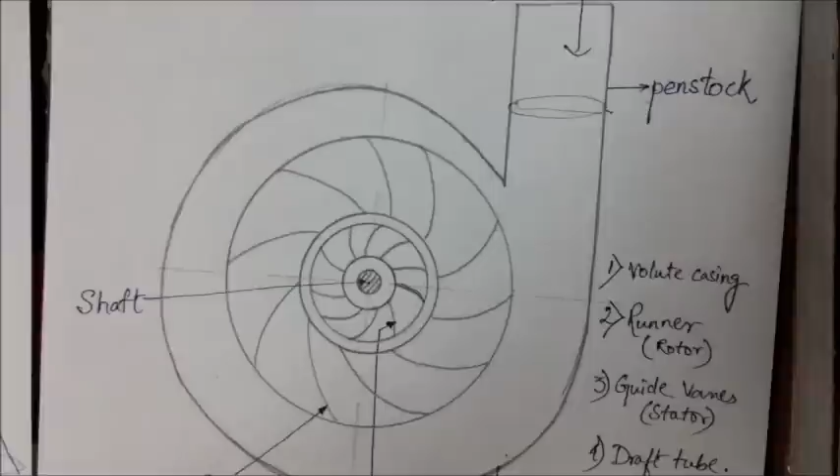Today I am going to discuss the Francis turbine. You can see this is the picture of a Francis turbine.

It is named after J.B. Francis. He was an American engineer, and he designed a turbine which can work at different pressure heads. Today I am going to discuss each and every point on the Francis turbine and also its velocity diagram.

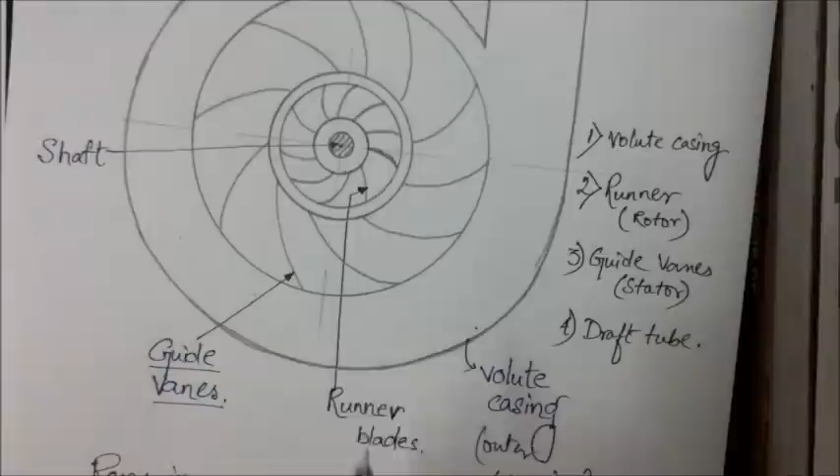First, let me tell you the names of different parts. This is the volute casing. This outer casing is actually the covering of the turbine so that it prevents the turbine from any mechanical damage. This is the runner blades. This is the runner, that means the rotational part of the turbine.

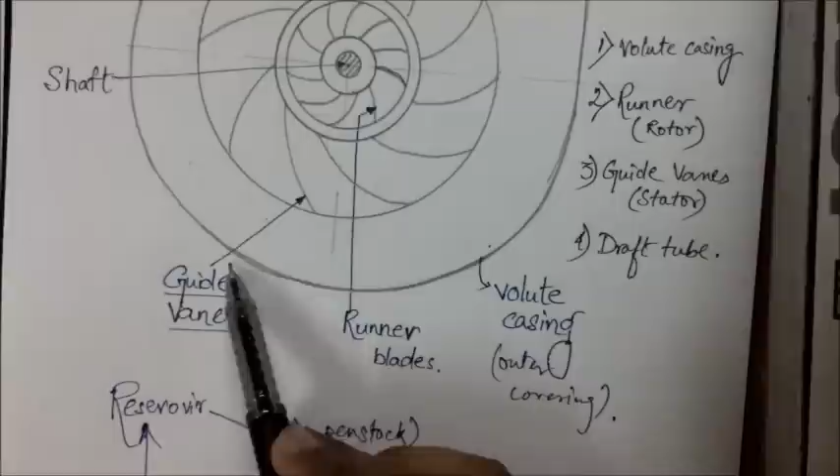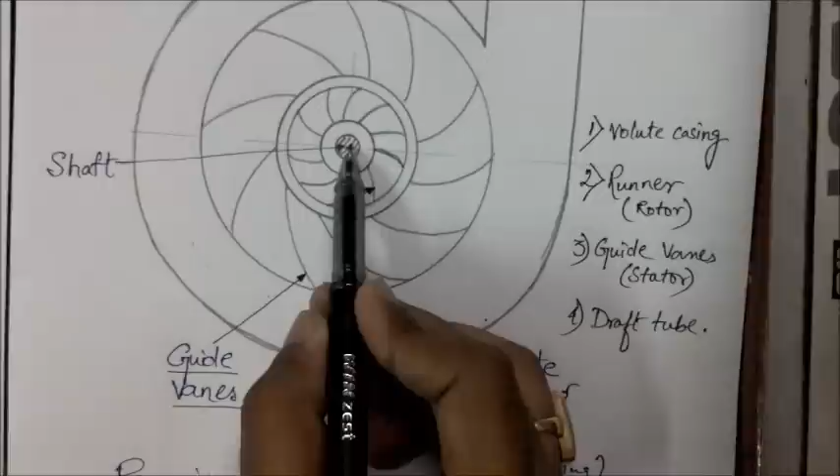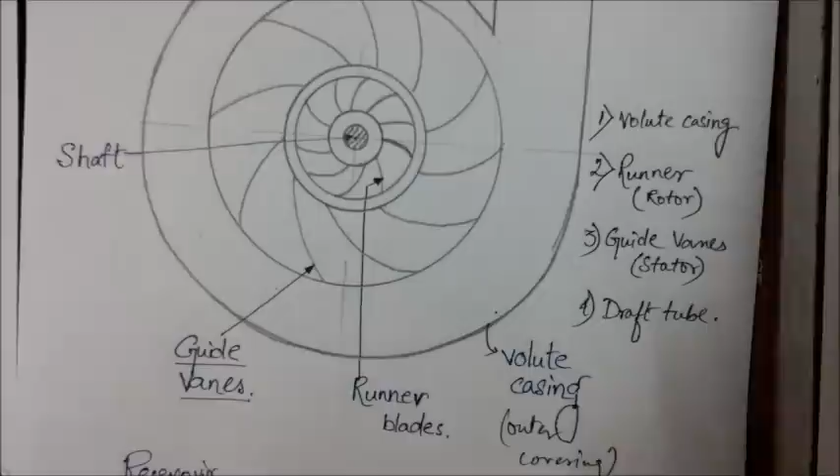I am going to explain, don't worry. These are the guide vanes or blades. This is the stationary part, it does not rotate. Here is the shaft. The shaft is mounted at the center. When the runner rotates, the shaft also rotates because the shaft is fixed in this way. You can consider this pen as the shaft. This shaft is fixed, and when the runner rotates, the shaft rotates and it rotates the generator so that we get electricity.

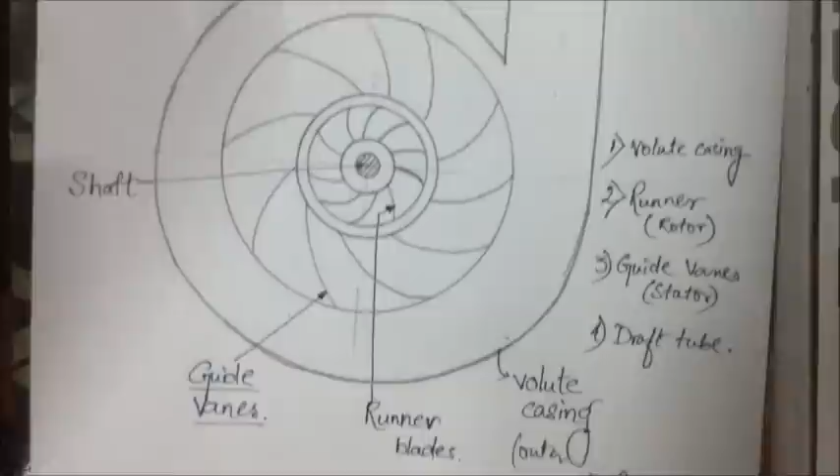So this is water, this is the direction of water. Now you can see it. Water enters through the penstock. What is penstock? Penstock is a pipe of large diameter. You can see in this figure that from the reservoir, where the water is stored at a great height, the penstock brings that water to the turbine.

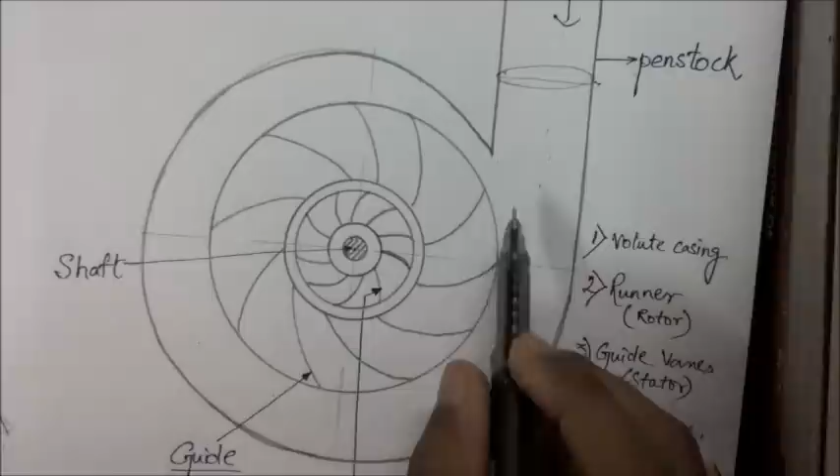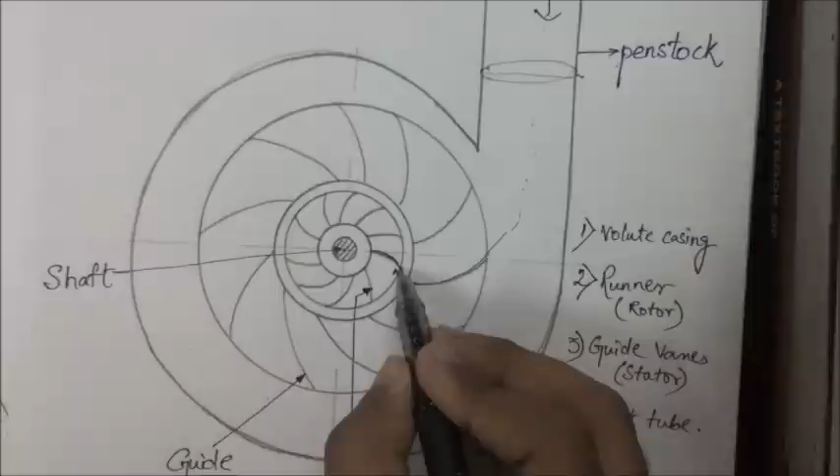So the penstock brought the water to the turbine. Now where will that water go? These are the guide vanes, as I already told you. What the guide vanes do is that they have no rotational purpose, they will not rotate, but they will guide the water to pass to the runner blades inside. Suppose water is coming like this, it will guide the water so that it enters from this portion of the guide vane and moves smoothly to the runner vanes. When it strikes the runner vanes, the runner blades rotate.

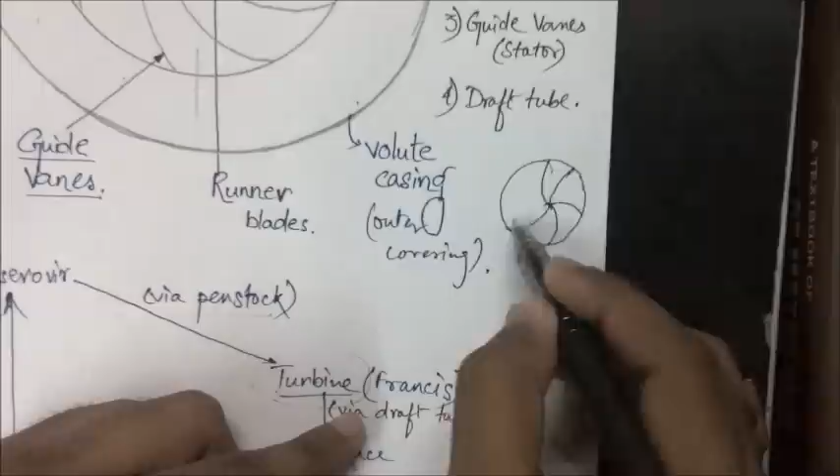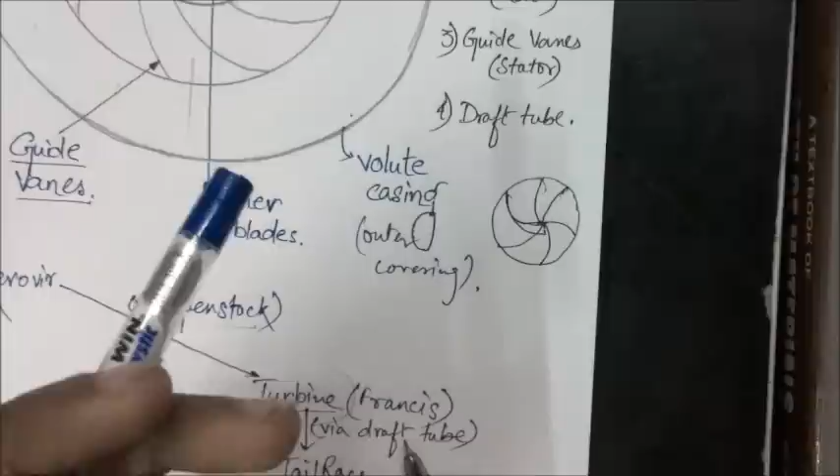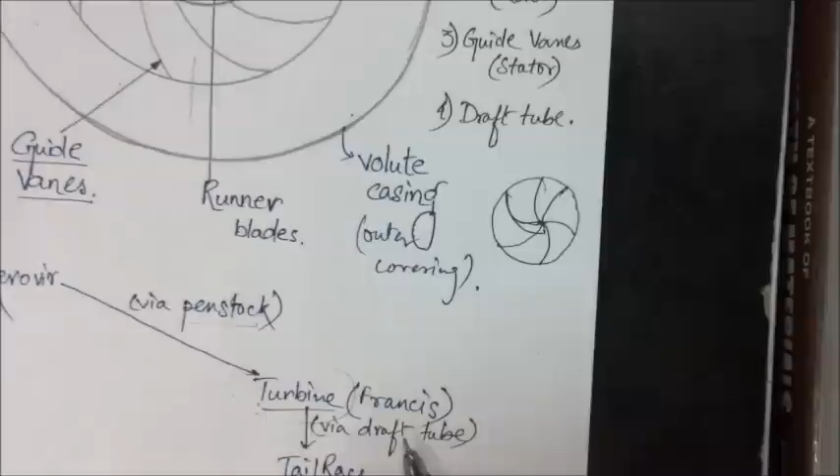Suppose you don't use guide vanes, what will happen? Suppose you have a turbine whose blades are attached like this, and you don't have any guide vanes. Suppose this pen is the jet of water, so the jet of water directly strikes the runner blades. What will happen? The runner blades will experience a severe shock, and due to that shock, the runner blades will not be able to rotate at a very fast RPM. So the efficiency of the turbine will be very low, you won't even be able to light a lamp at that speed. If water suddenly gets into the runner blade, it experiences a jerk and it will not work properly. That's why we use guide vanes, to prevent this jerk or shock.

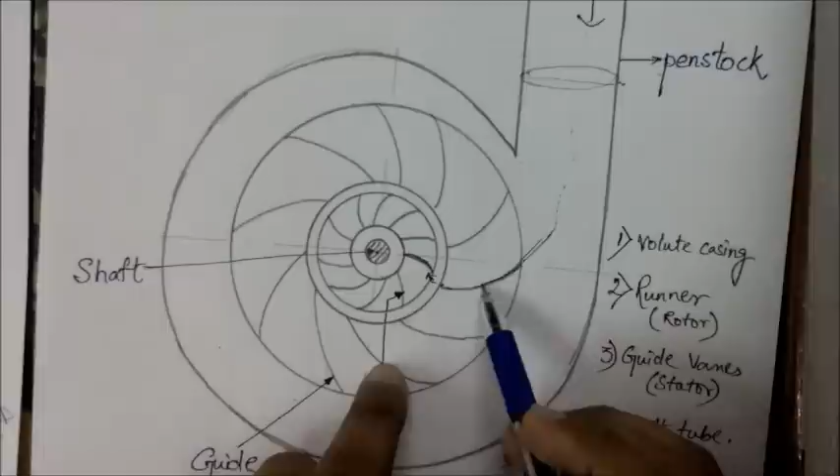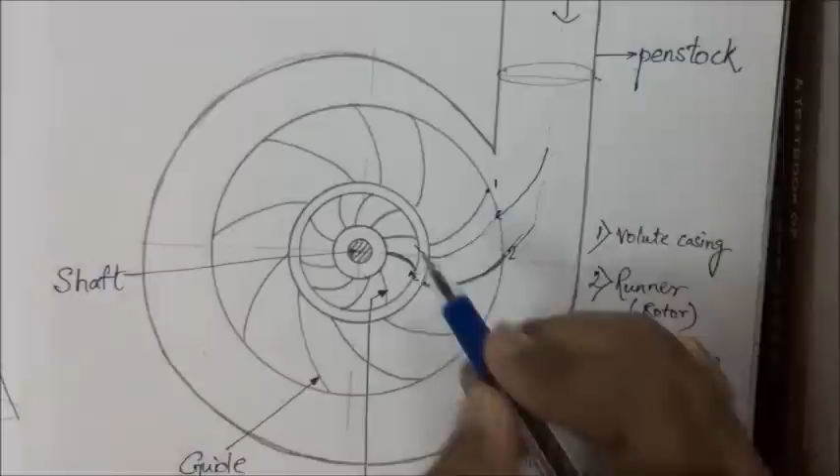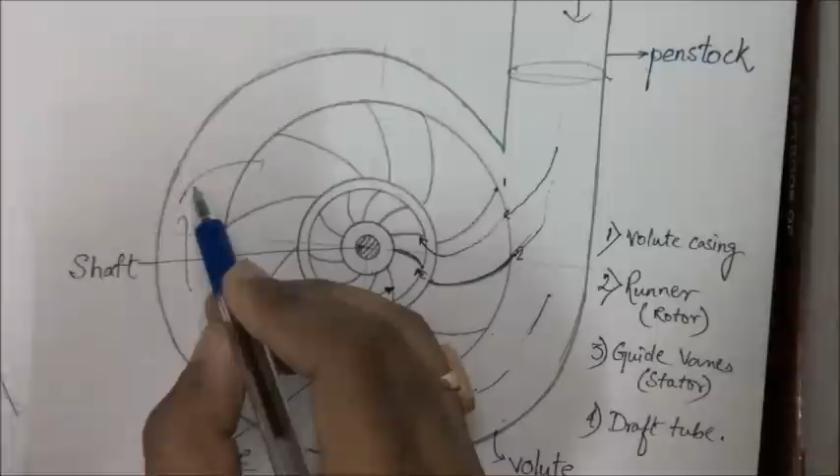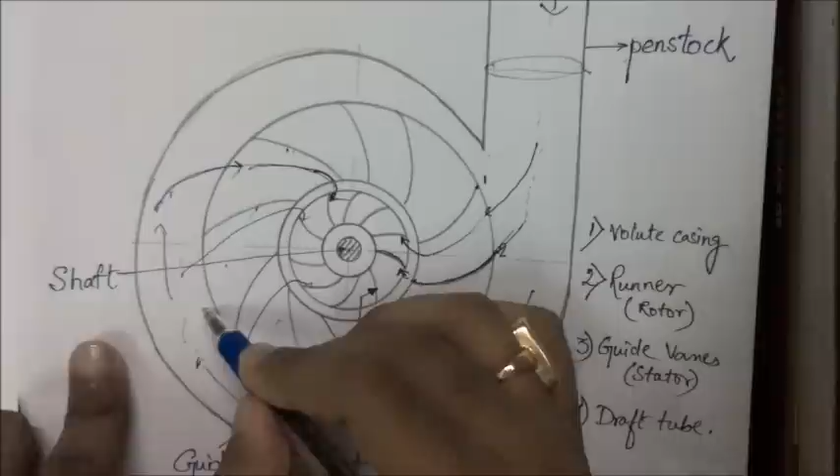So when water comes through these guide vanes very smoothly, it goes and strikes the runner blades. Suppose water is entering between this first guide vane and this second guide vane. The water enters through this portion and goes on like this. The guide vanes guide the water to the runner vanes, and it strikes the runner vanes like this. The water which entered between vane 2 and 3 will strike like this. Suppose some part of the water has also moved up and is entering from here — I am showing examples, but actually water enters from all parts. These guide vanes will guide the water to move to the runner vanes, and it will go and strike it like this, from different points, so you can see how it strikes the runner vanes.

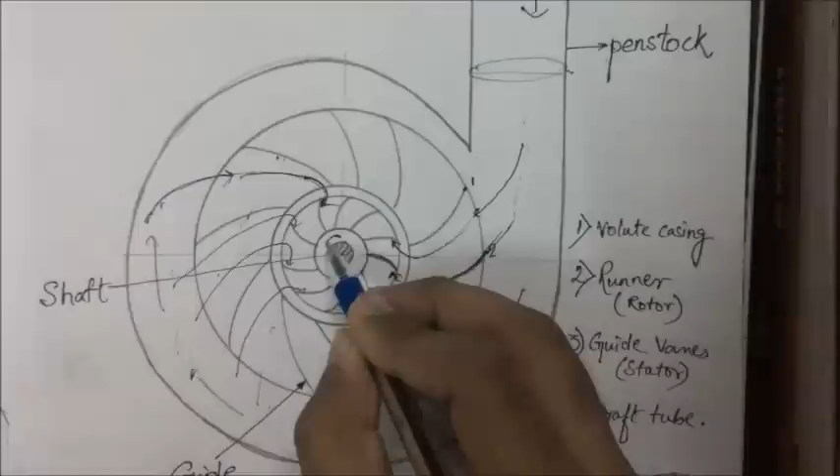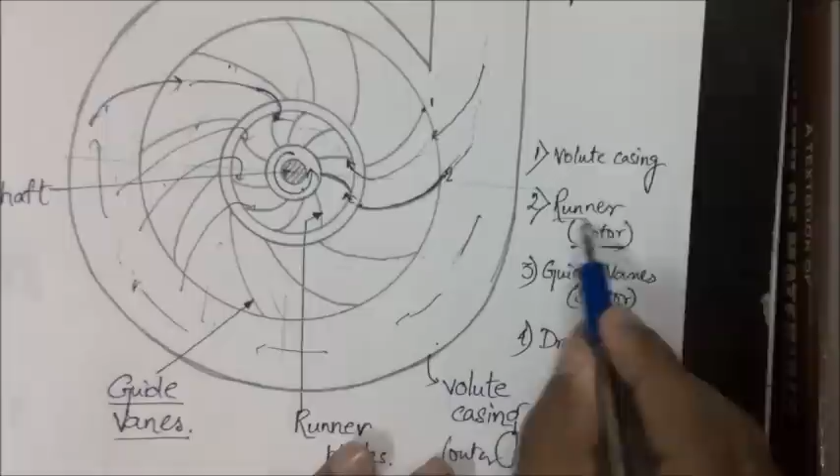When it strikes the runner vanes, they start to rotate in the anti-clockwise direction, because the water hits and makes it rotate like this. So the runner vanes are the rotor of the turbine. Rotor means the part which rotates. We have a rotor in electric motors also — there is a rotor and there is a stator. Stator means the part which is stationary.

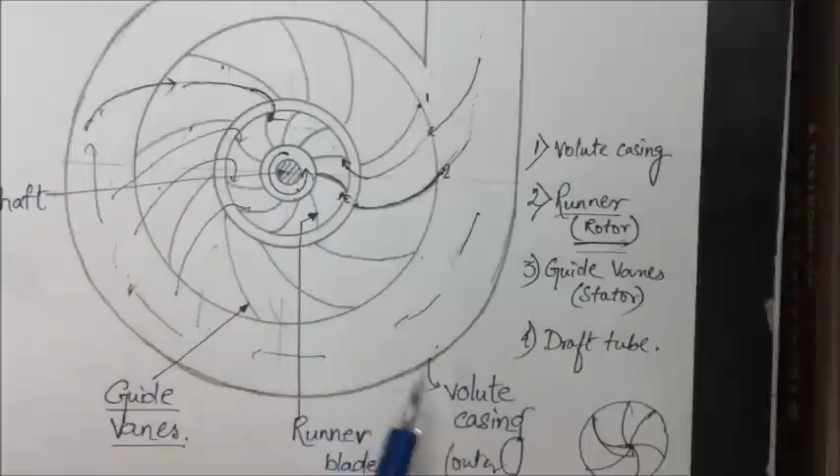Guide vanes, it is fixed. It will not move. It will just guide the water which will flow into the runner. So guide vanes is a stator because it is stationary.

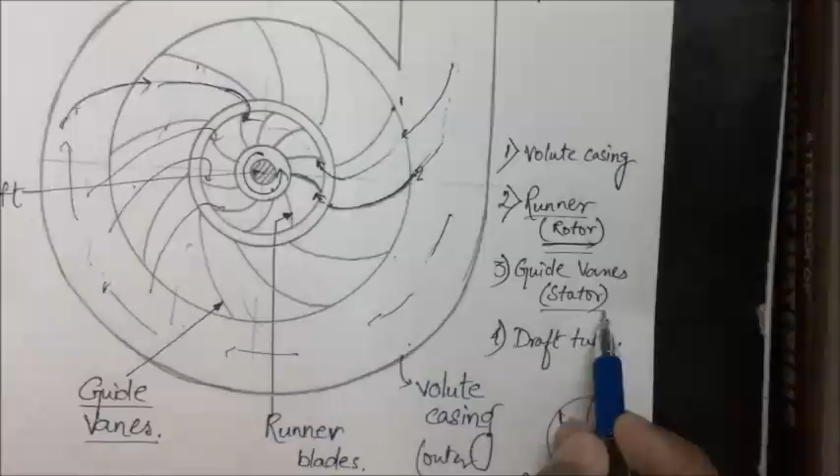You have got the concept of volute casing. In volute casing, it is of decreasing cross section so that the velocity remains constant.

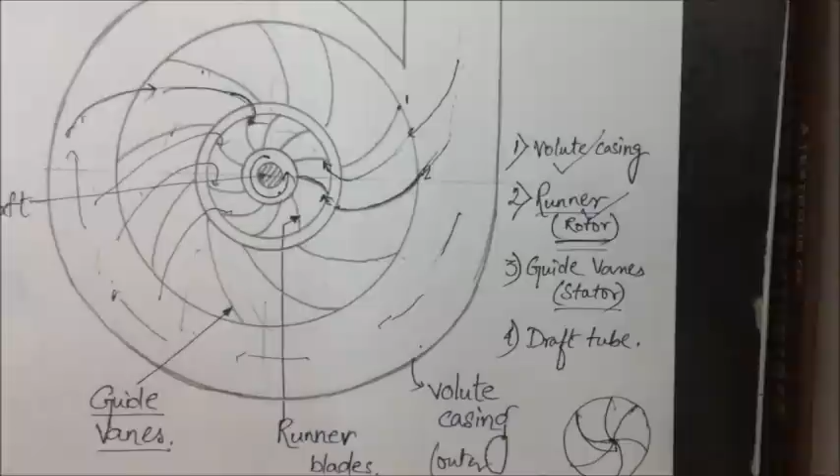You have got the concept of runner. Runner is the part in which there are some blades which are known as runner blades. When water strikes the runner blades, they rotate the runner, and when the runner rotates, the shaft will also rotate.

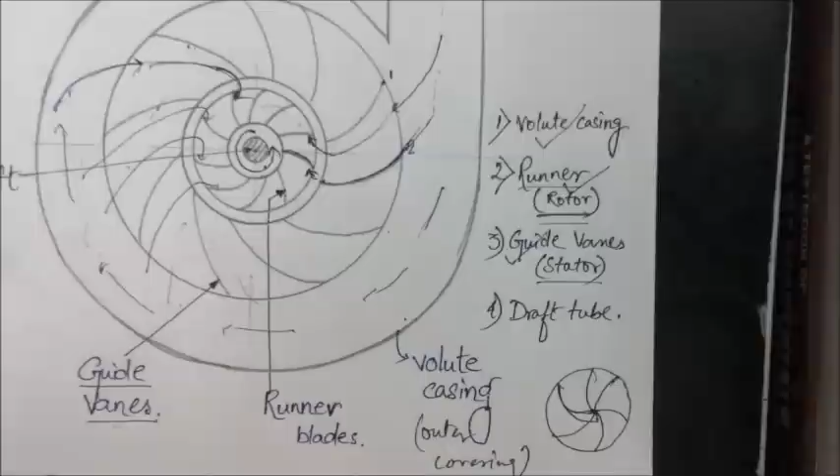You have got the concept of guide vanes. What is guide vanes? It guides the water to the runner vanes. If it is not there, then the runner vanes will experience a shock and they would not run at a high speed due to that shock.

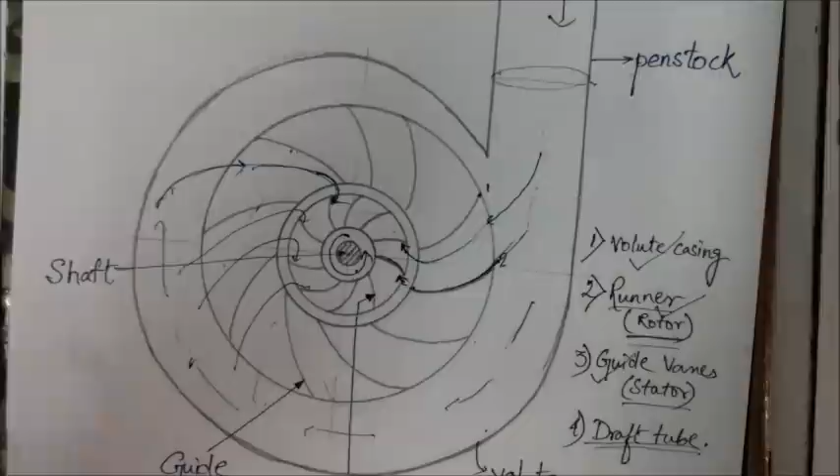Now only one thing is left to understand in this figure, the draft tube. What is draft tube? Have you ever wondered, a question may come to your mind, that the water which is entering the turbine is going into the turbine. Where is it going then? Is it getting consumed? No, water is not getting consumed.

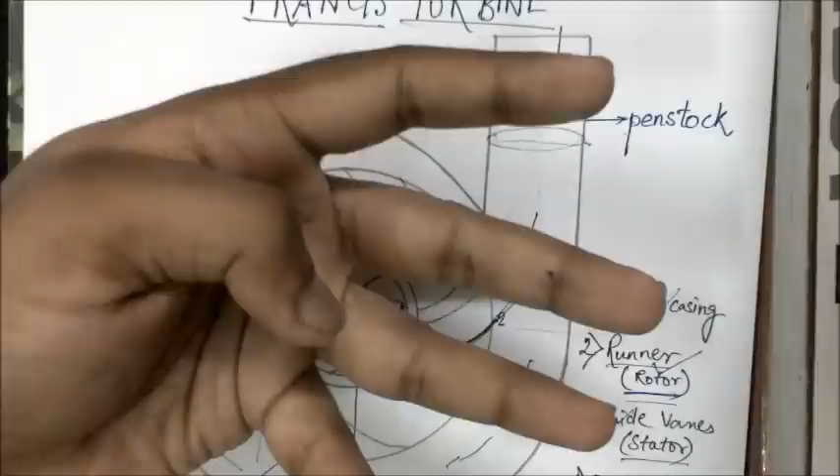Try to understand. You can see my four fingers, consider these as vanes or blades. This is one blade, this is another, so these are the four blades. Consider that these are runner blades. Suppose water, consider this pen as your water, this pen and these two pens as your water.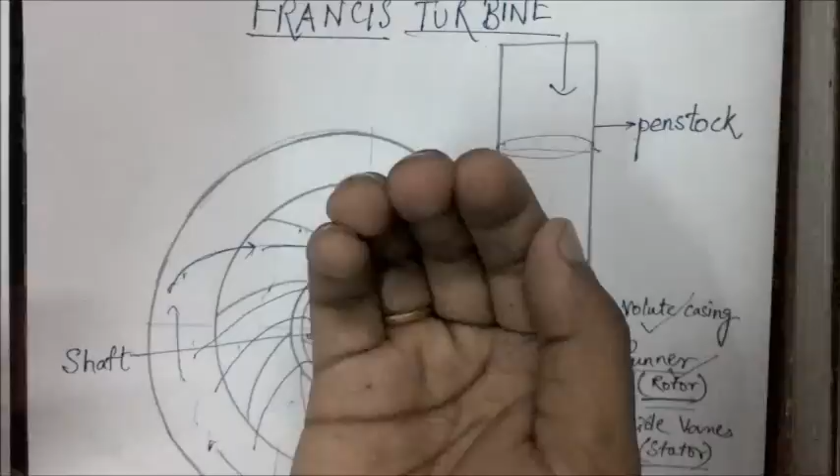Water will strike the runner blades and it will fall down. It will go into the runner blade and fall down. So you must have a pipe to hold the water. Suppose this is my pipe, and this is my vanes, and now the water which falls through the gaps of the runner blade will fall into this pipe. This pipe will transmit the water to the tail race.

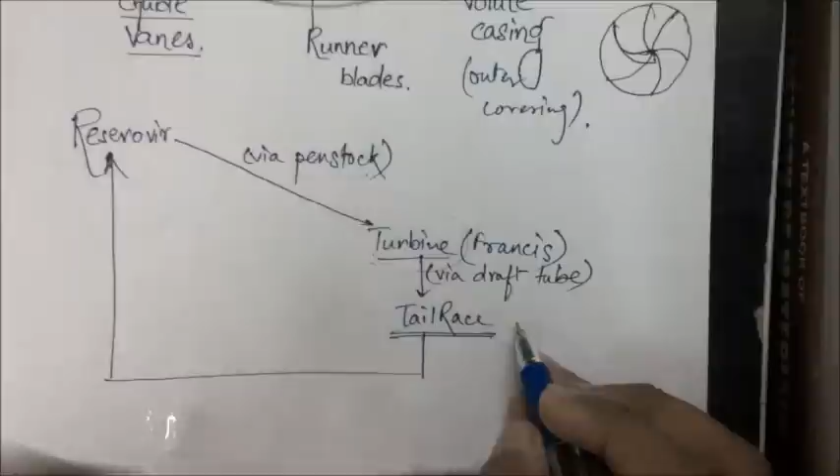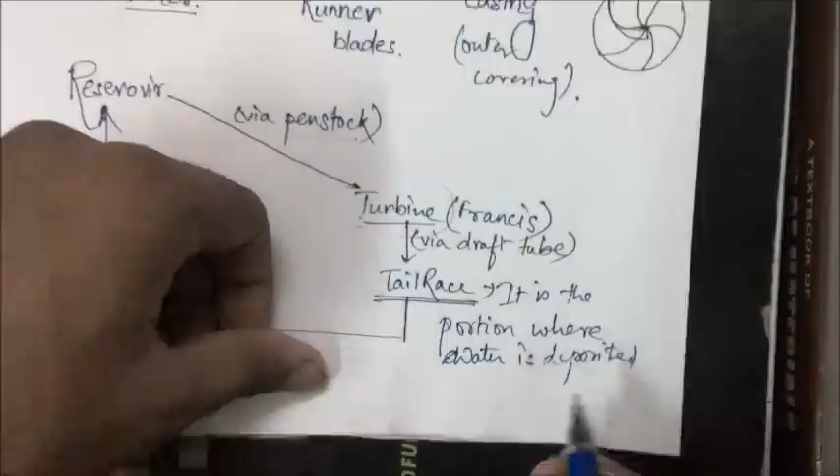You can see this figure. Tail race, it is the portion where water is deposited after coming out from the turbine.

Now I have talked about the pipe which transmits the water to the tail race. That pipe is actually known as draft tube, and the design of that draft tube, or that pipe, looks something like this.

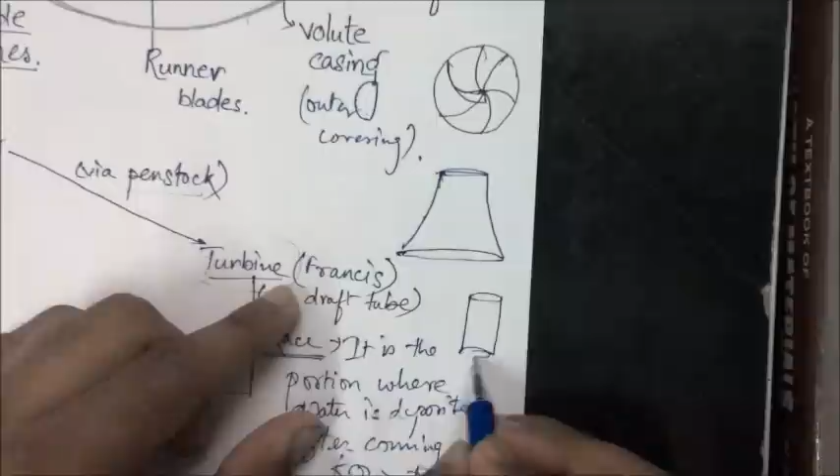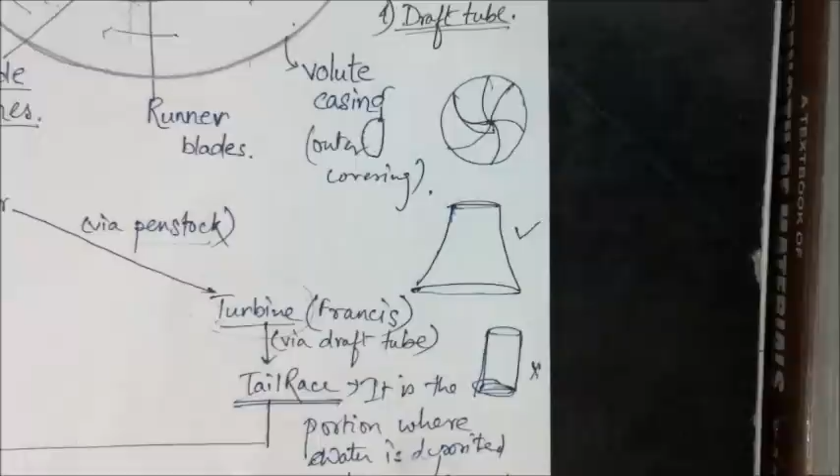That means the pipe is of increasing cross section. Normally we see pipes like this whose cross section at the inlet and outlet is the same, but we do not use these kind of pipes over here. We use pipes whose cross section is gradually increasing. What will happen when the cross section gradually increases? Here your area increases, isn't it? If your area goes on increasing, we know from the equation of continuity that velocity will decrease. If area increases, velocity will decrease.

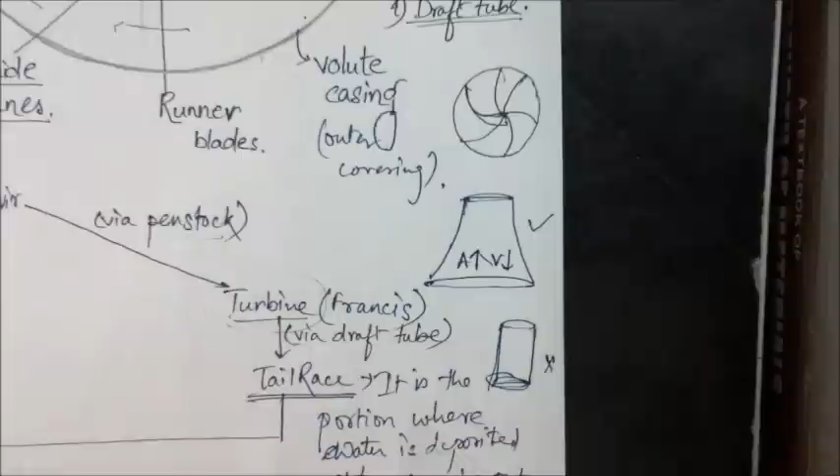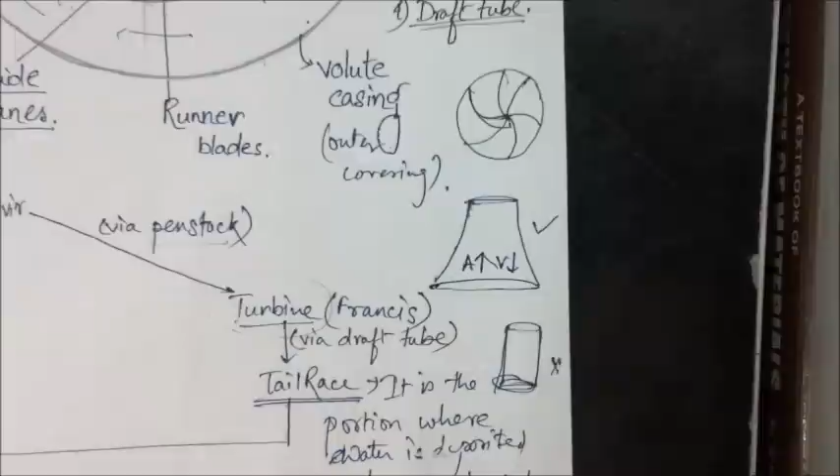Now velocity decreases means kinetic energy goes on decreasing. Where will that kinetic energy go? That kinetic energy will be converted into pressure head. So instead of wasting my kinetic energy, I am using it to convert into pressure head, so that the water from the tail race can be taken to the height of the reservoir. This is the function of the draft tube.

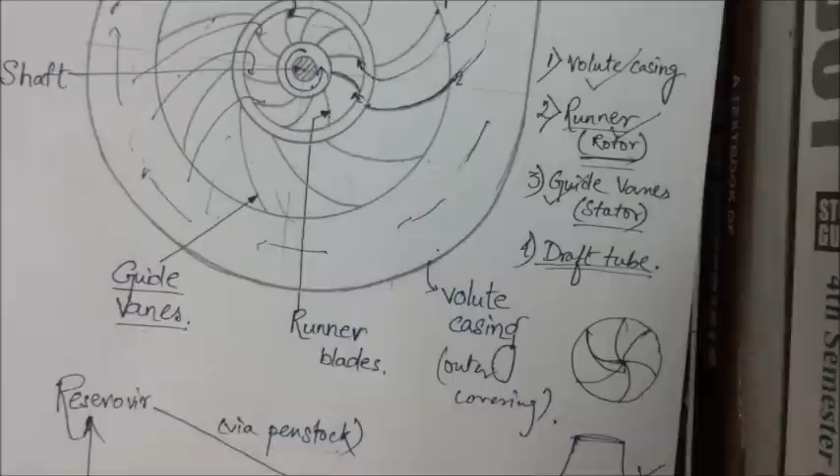That means draft tube is a pipe which is attached just below the runner blades, and the pipe is designed in such a way that its cross section gradually increases. Just this much, nothing more in the concept of the Francis turbine.

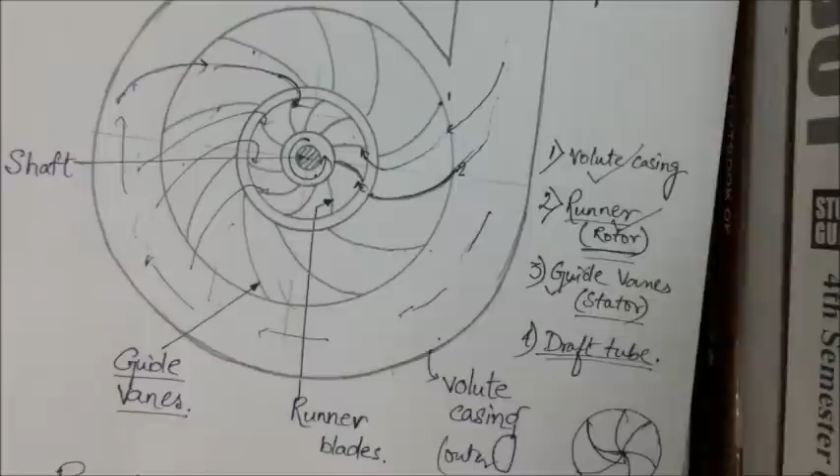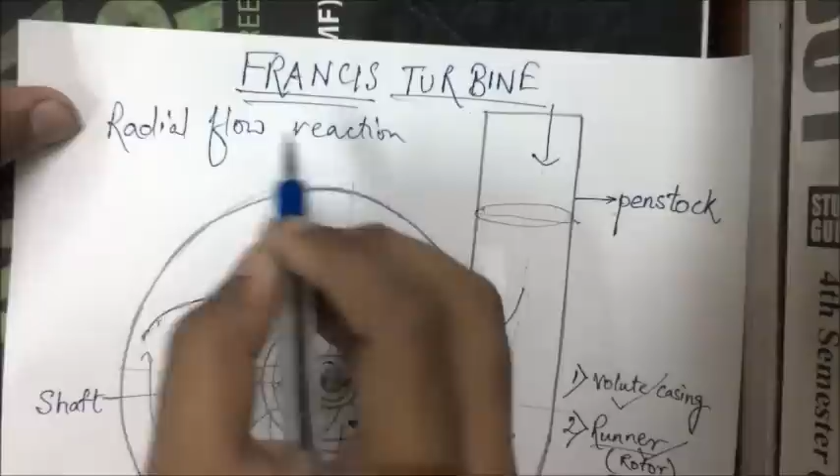Now we have to look into the vector diagram of the Francis turbine. I have just forgotten to tell you that Francis turbine is also known as a radial flow inward reaction turbine.

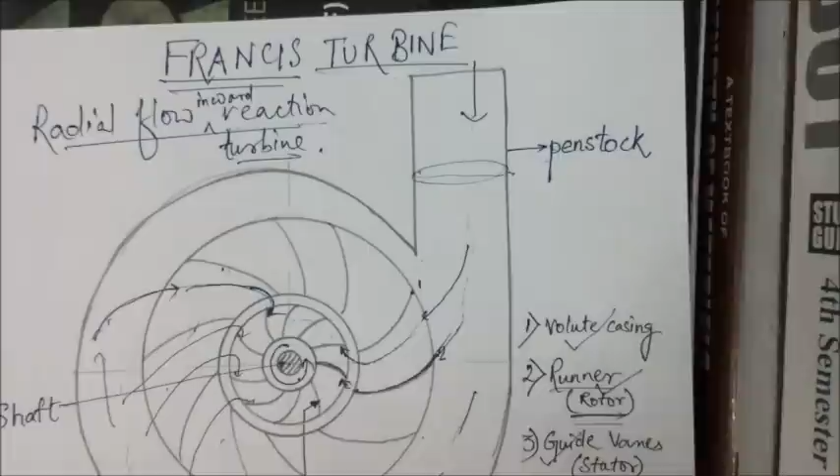Why reaction turbine? Reaction turbines are those turbines where the turbine depends upon two factors: velocity and pressure. Both factors are important here, because when the water at high velocity from this portion reaches the guide vanes and strikes the guide vane, velocity decreases a bit and pressure energy increases. So both factors come into play.

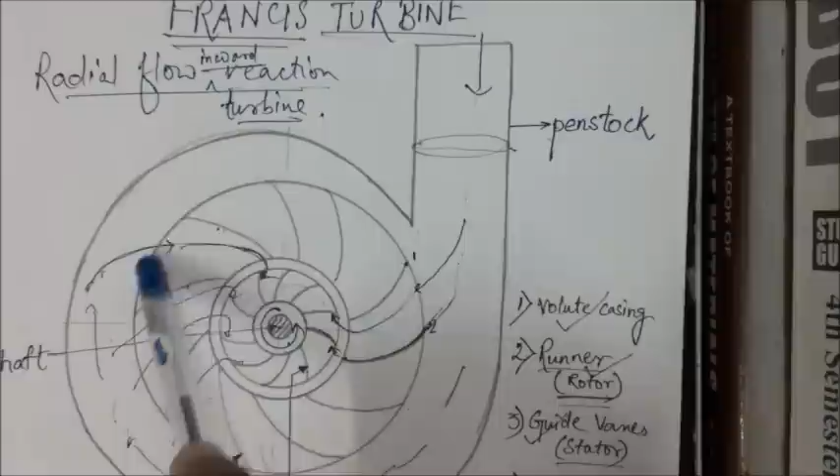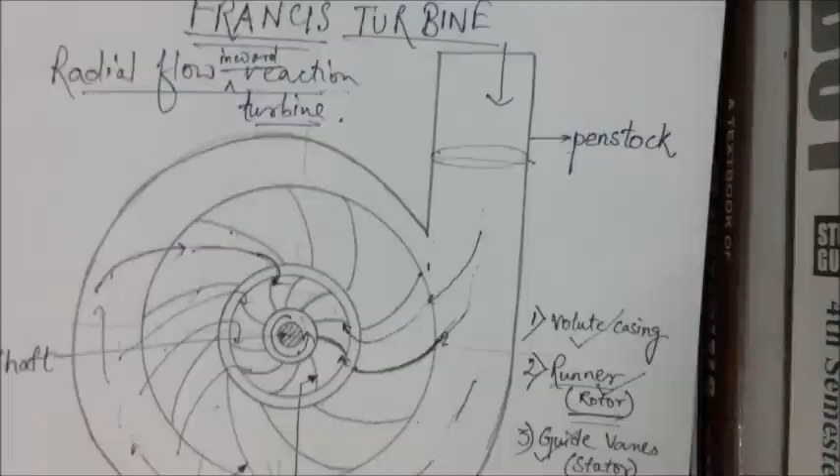Now why inward? Because you can see easily that water from outside, from the penstock which is outside the turbine, is coming gradually inwards. It is going inside, isn't it? From the guide vanes it moves inner to the runner blades and even more inner, and then it slowly goes to the draft tube. That's why it is called an inward reaction turbine.

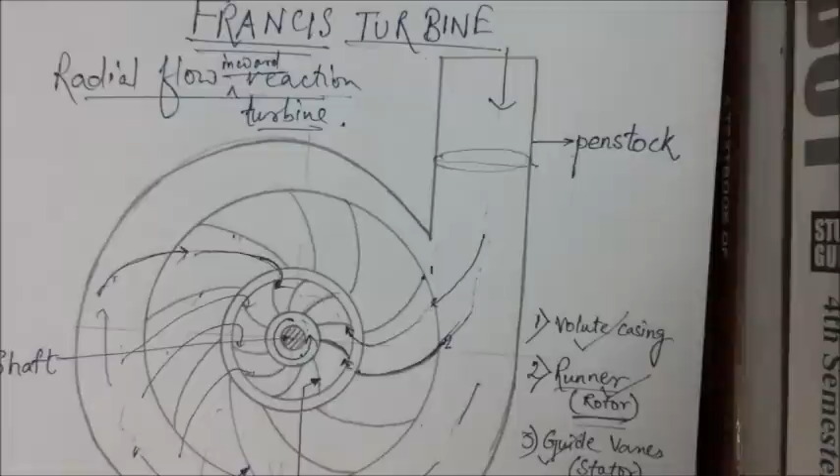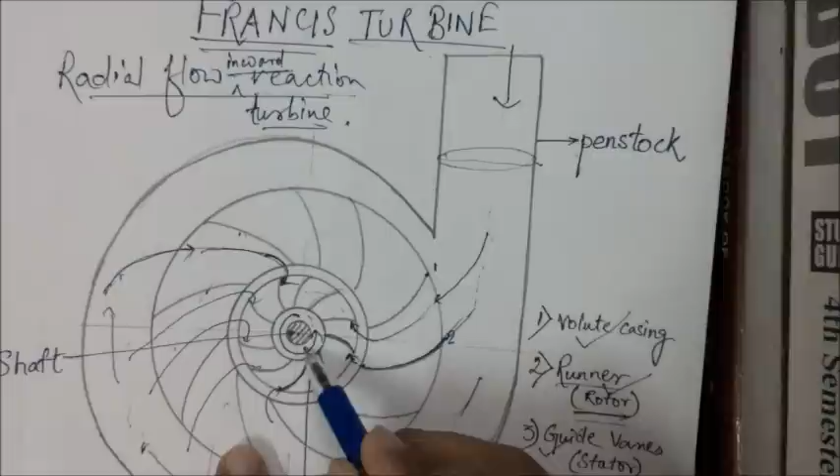Why radial flow turbine? Because at the outlet, suppose this is my runner vane. Please focus on this. Suppose I am considering this runner blade. This is the runner blade. Water enters and strikes this runner blade like this. Now water moves along this blade and leaves this portion something like this.

Okay, have you got it? If you have not noticed, please notice it once more.

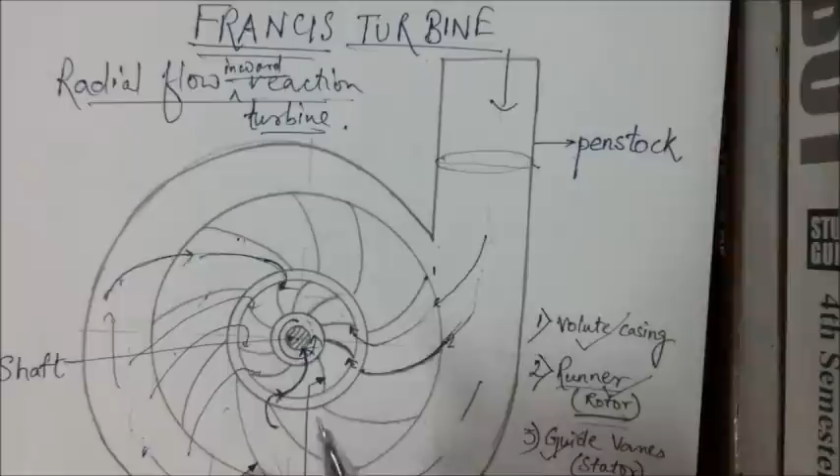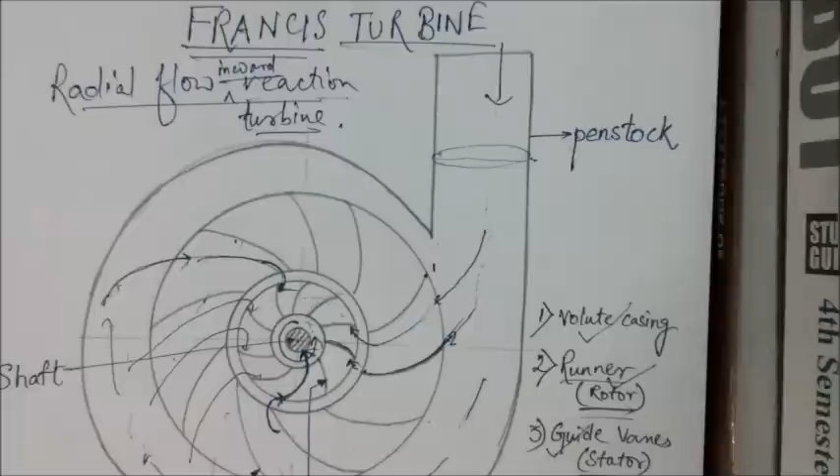Water enters and strikes the blade here, then it moves along the surface of the blade and leaves it in this direction. This direction is the radial direction, towards the radius. At the outlet, it does not have any tangential component, it has only the radial component, along the radius. That's why it is known as a radial flow reaction turbine.

Okay, now I will show you the vector diagram, which you will need to solve problems of Francis turbine.

Suppose I will take this vane and draw it. I will just magnify this vane in this page. Suppose this was my vane, my smaller vane, and I have just magnified that vane over here.

Okay, no problem I think. Water enters like this. This is my velocity v1. This is u1. This is vr1, the resultant of v1 and u1.

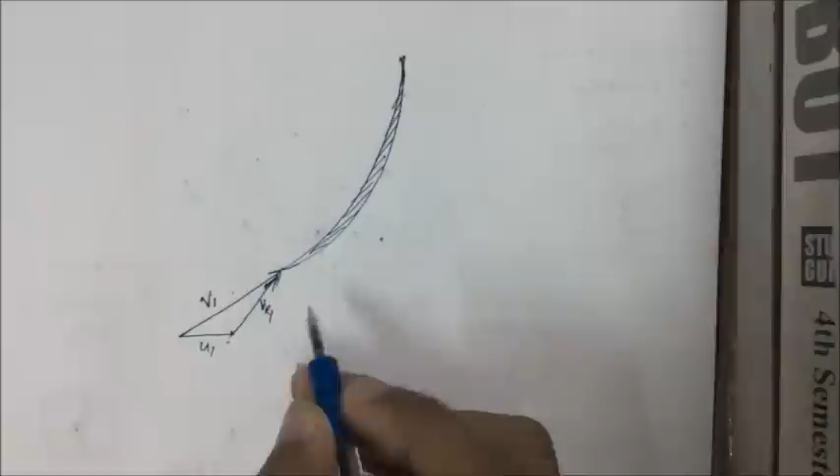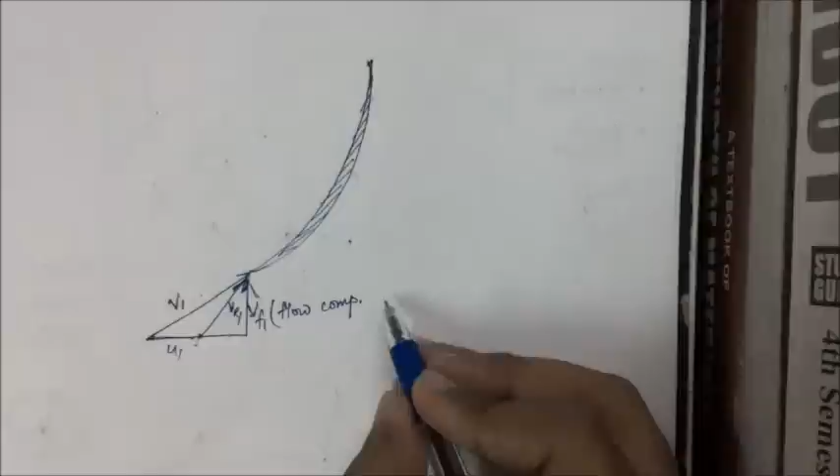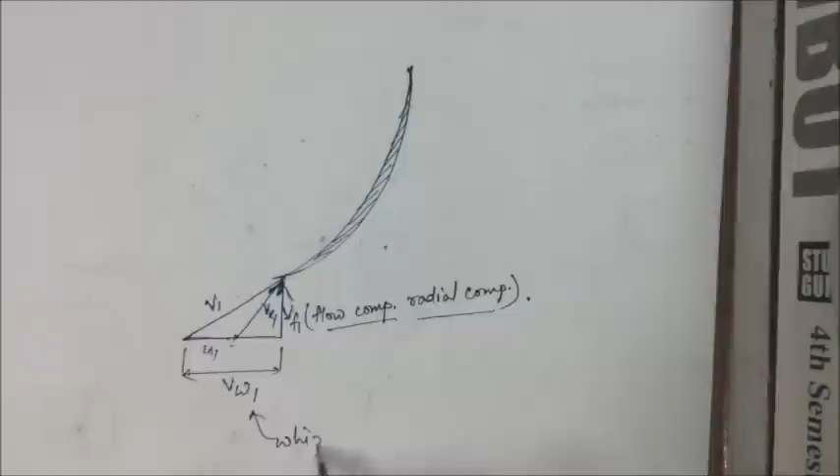If I break v1 into two components, I get one radial component, vf1, which is the flow component or radial component, also known as flow velocity or radial velocity. This total one is vw1, the whirl component or tangential component at inlet.

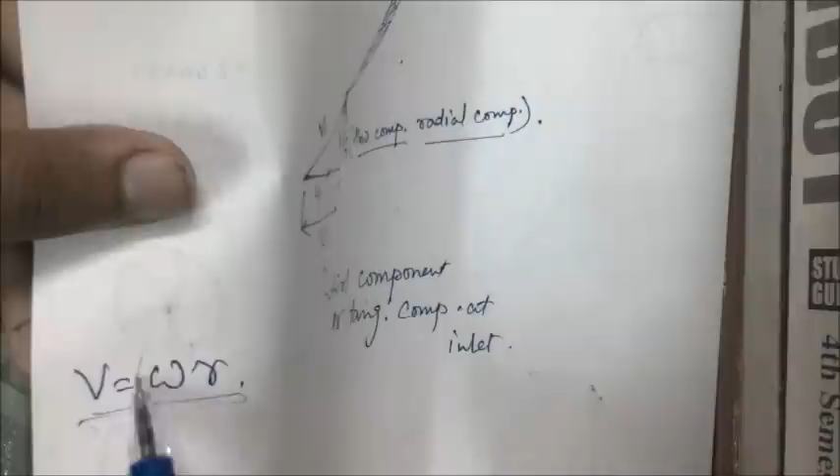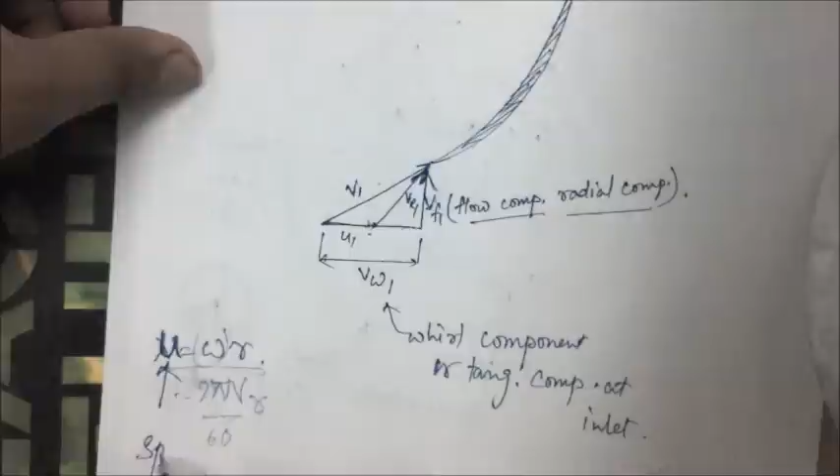What is u1? It was the tangential speed of the runner blades. The runner blades have a rotary motion, so anything with rotary motion has angular speed, with the relation v equals omega r. If I know my angular speed omega, which is 2 pi N by 60, multiplied by r, I can find my velocity. This is small u, the tangential speed of the runner blade. Now what happens at the outlet?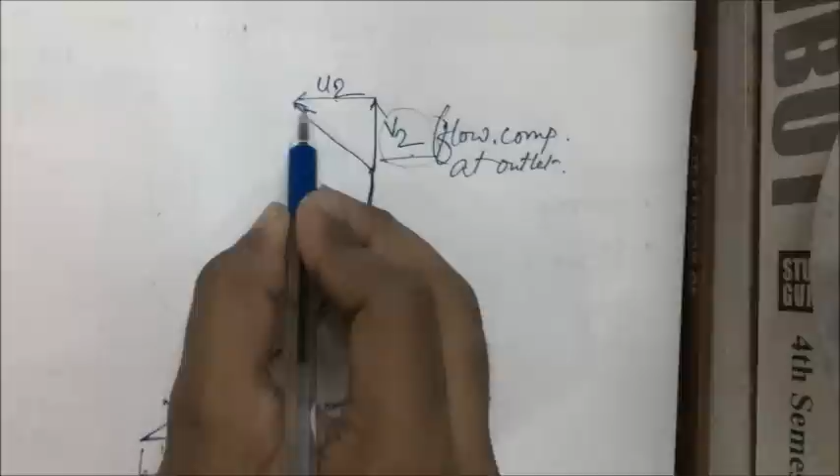The water v1 which entered with velocity v1 will move like this, and it will have only the flow component, the perpendicular component I call v2. At the outlet, the jet of water will not have any tangential or whirl component. There is no vw2 because it is a radial flow turbine, and at the outlet the water flows radially towards the center. This is the flow component at outlet, so this is u2, and this is vr2, the relative velocity at the outlet.

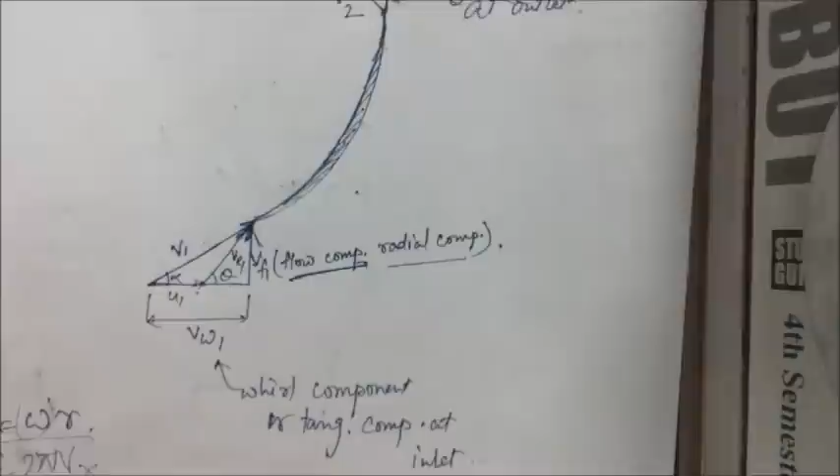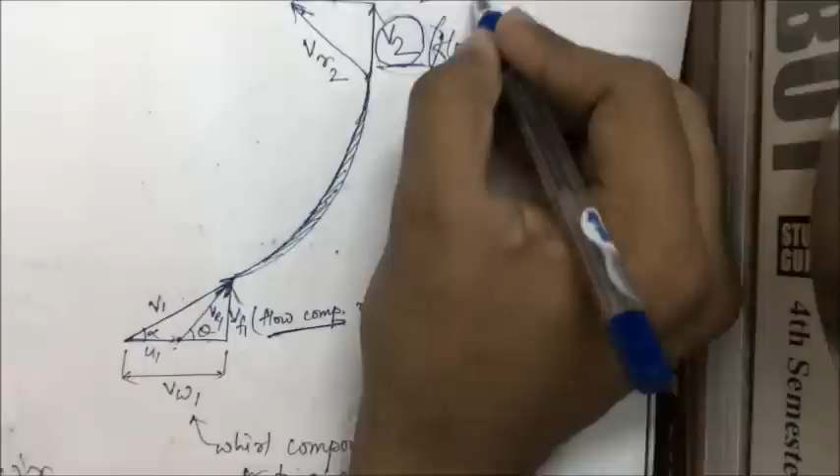If I name these angles, alpha, theta, whatever you name them, naming is not that important, you have to understand the concept. Why is there no vw2 at the outlet? Because there is no whirl component or tangential component at the outlet, only v2, which is actually equal to vf2 in this case, since there is no tangential component, only the radial component.

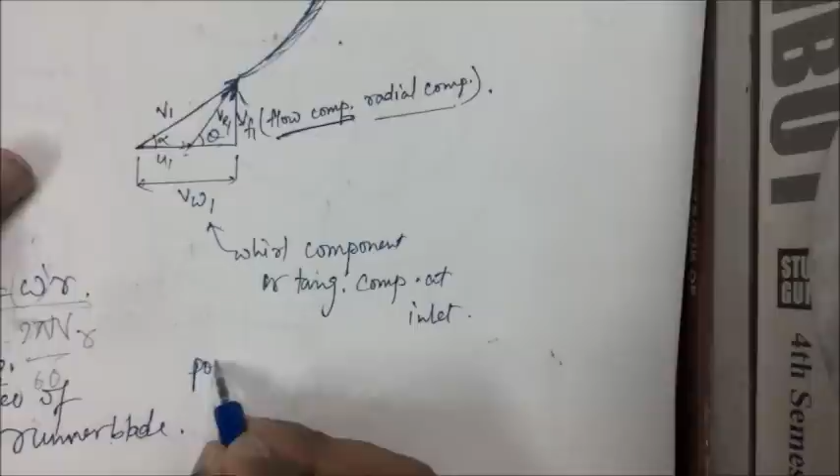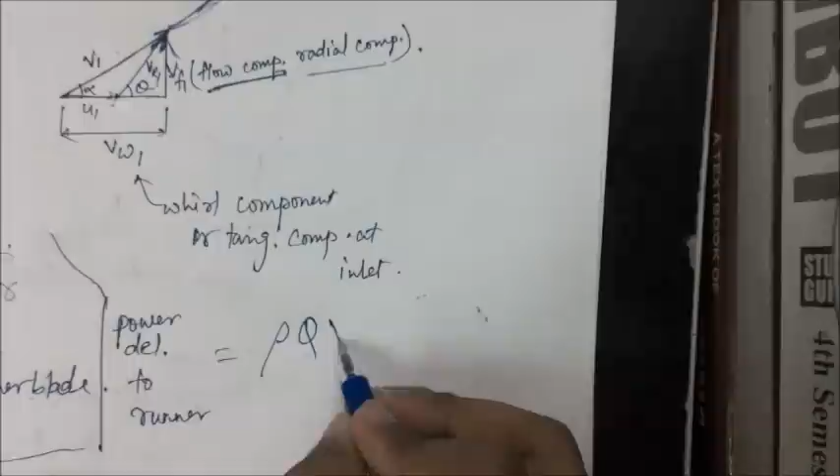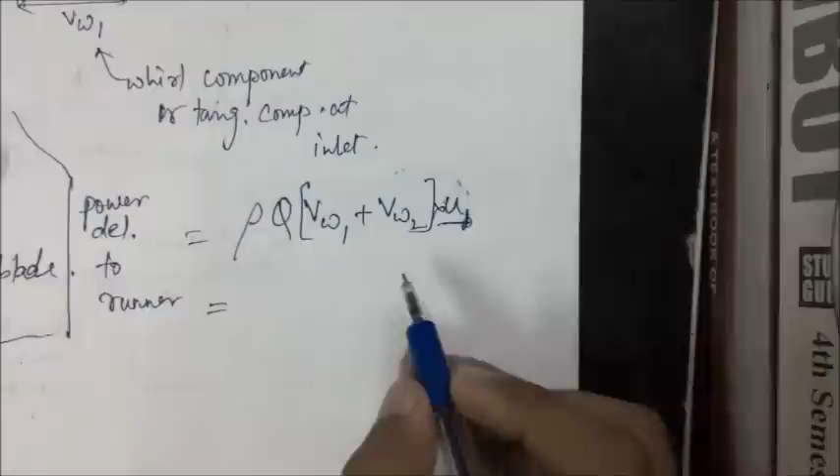Now, what is the power delivered to the runner? I've already said it is rho Q (vw1 plus vw2) into U, in my previous lecture on Pelton wheel turbine. Here there is no vw2 in case of Francis turbine, vw2 is equal to zero. So my formula becomes rho Q vw1 U.

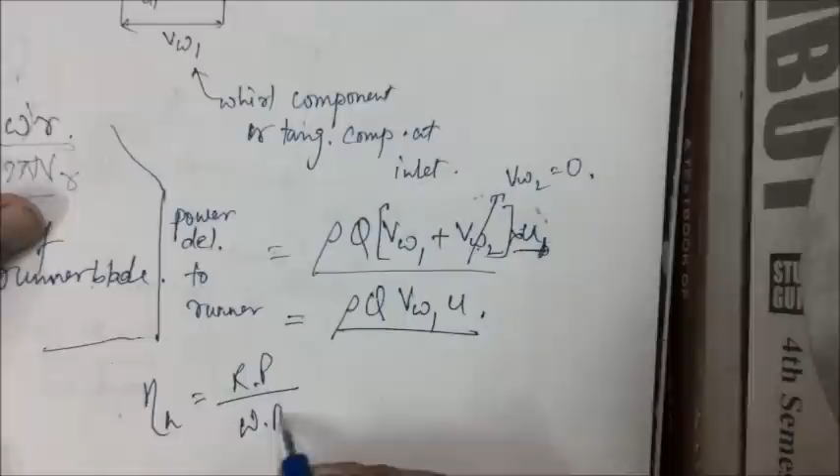What is hydraulic efficiency? It's the runner power divided by the water power. My runner power, which I found, is rho Q vw1 U. Now what is water power?

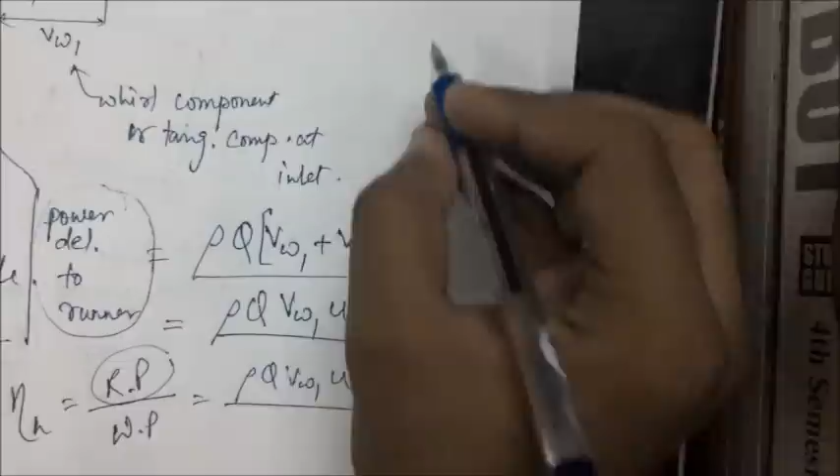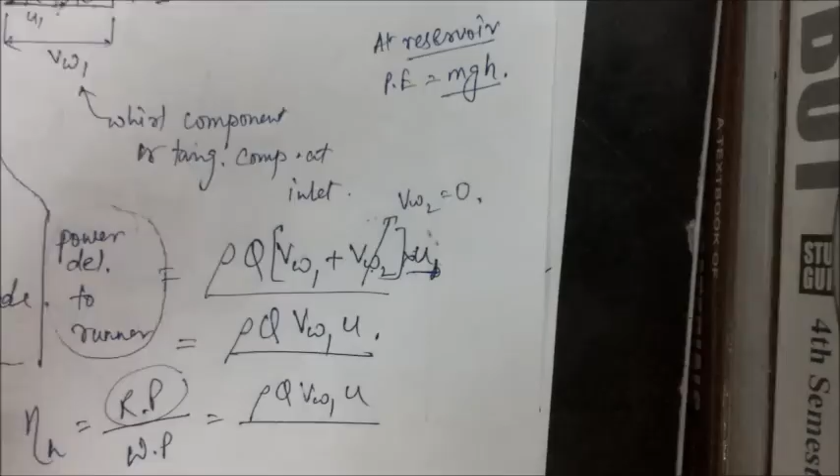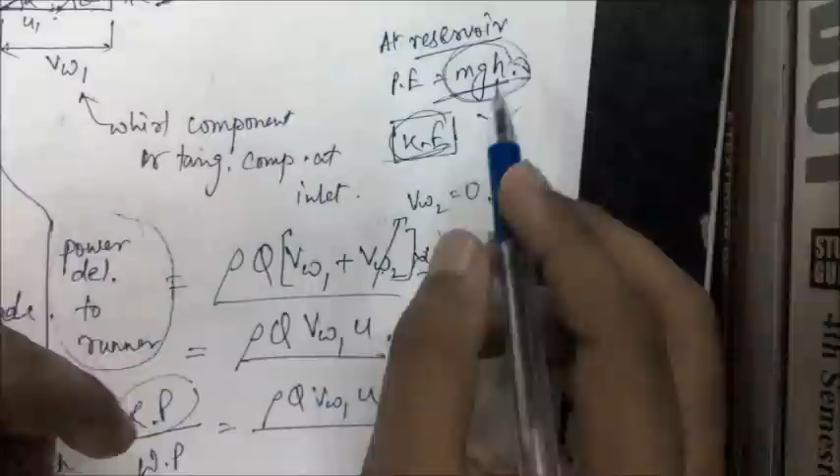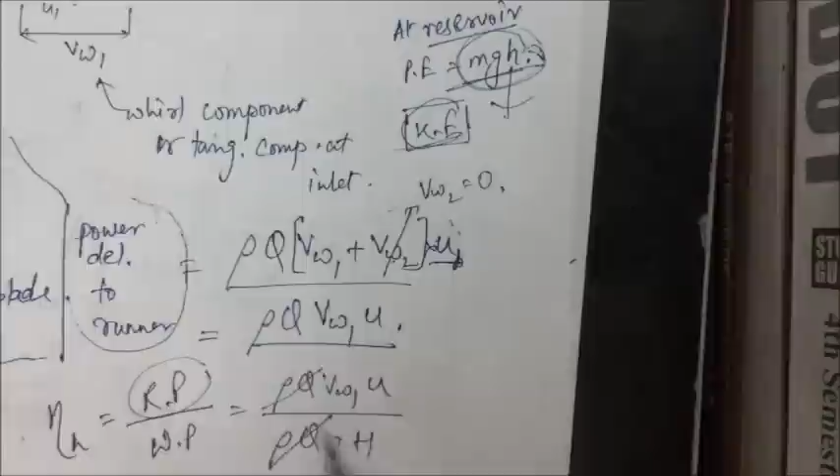Water power is the power with which water falls from the reservoir to the turbine via the penstock. At the reservoir, water has potential energy equal to mgh, where H is the head of water. That energy is transferred into kinetic energy, mgh, which I can also write as rho Q g H, replacing mass by rho into Q, where Q is discharge.

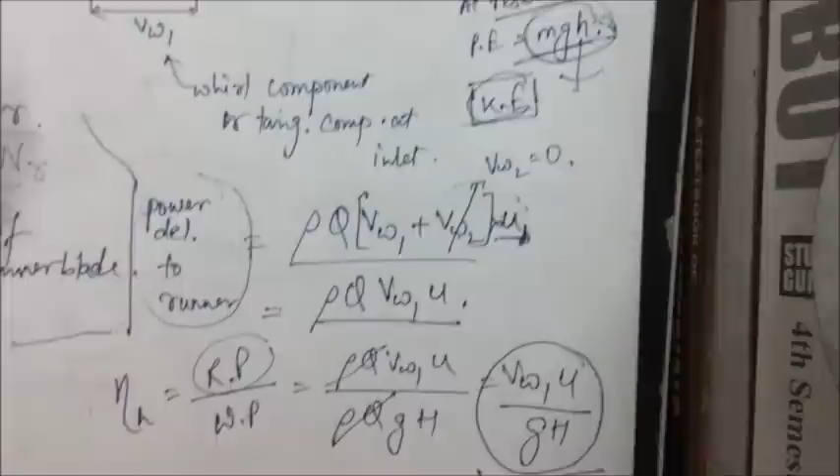So if I cancel these things, my formula becomes vw1 U divided by gH, where H is the head of water. If you have understood this concept, you will be able to solve any kind of problem in Francis turbine.